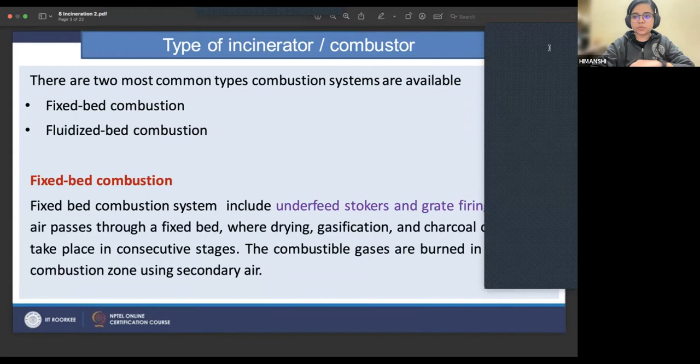Yeah, so any of you quickly, what we understood from this slide, what was the motive behind this slide? Guys, everything is written here. You can just, it's not too old, just week 2. What was it?

Without active participation, how am I going to discuss questions with you? With discussions, see, this is what happens when we are discussing things. It makes our mind more prone to understanding, and it helps us in understanding more clear, like getting more clear understanding about the concepts and the things. It's like a revision for you. So this will help you in solving your assignments as well as helping you in preparing for your final exam for the certification or the credits for whichever you guys are working. So it's okay, even if it is wrong, we can discuss, no worries.

But what do you remember from this slide, or what was the basic motive behind this slide's information? You can type in the chat box also. I don't have any problem. If you don't want to unmute and say, you can just type in the chat box. Anyone?

Okay, so can you guys at least tell me that you didn't understand whatever is on this slide, so that I can start explaining. You didn't understand what was on this slide? Okay.

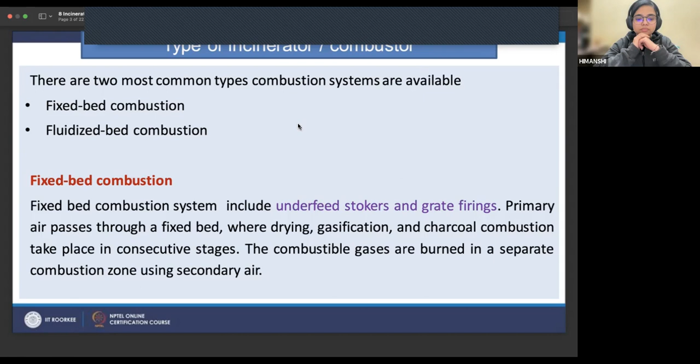Anyone of you? You can type in the chat box. You can unmute. Ma'am, can you please repeat the question? I just want to know what is fixed bed combustion. It is a type of combustion system, fixed bed combustion. What was fixed bed combustion? It's written on the slide, guys. You can read it, you can understand it, and you can make me understand.

Fixed bed combustion is basically a combustion process where the complete process is performed on a bed. Rohan, can you use a more waste to energy related term for bed? Can it be a grate? Correct? Because fixed bed is in the name itself. Bed can be anything, but in this specific case there's a long structure, a combustor, which will have a fixed bed on which your raw material or waste material will be, on which air and heat will be passed for complete combustion of the material.

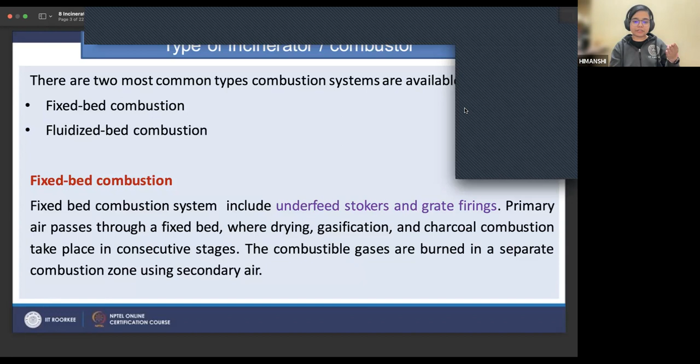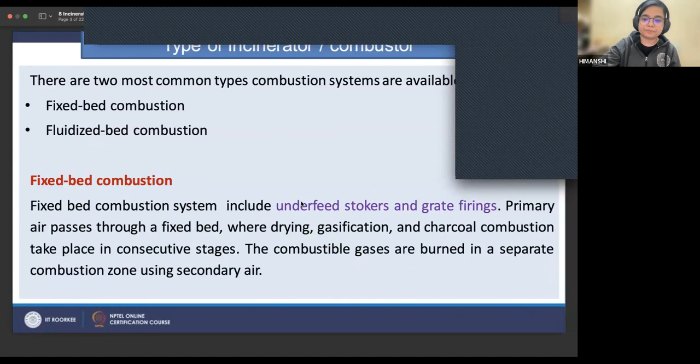Then, as you can see here in the fixed bed combustion definition, fixed bed combustion systems include underfeed stokers and grate firings. Primary air passes through a fixed bed where drying, gasification, and charcoal combustion take place in consecutive stages. The combustible gases are burned in a separate combustion zone using secondary air. Yes, a type of boiler, correct.

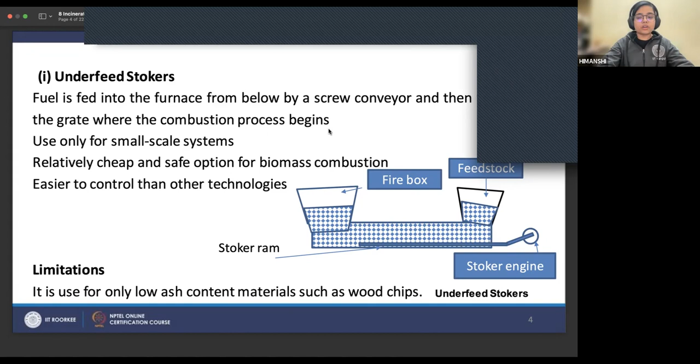So what is basically an underfeed stoker? The fuel is fed into the furnace from below by a screw conveyor. A screw conveyor is just a way of transporting stuff towards the machinery, as you must have seen in certain movies or documentaries of our industry. There is a continuous conveyor belt on which either the initial or the final products are rolling. So it is a screw type of conveyor, and they are forced into the grate where the combustion process begins. They are small scale systems and relatively cheap.

They are very easy to control. This is one of the primary types of combustors which were used. One of the problems with these older methodologies is that it can only be used for material which has low ash content. Why? Because it is fed from the bottom, right? If you have more ash content and more water content, you need to provide more air for it to be completely oxidized. Correct? So this is a kind of limitation.

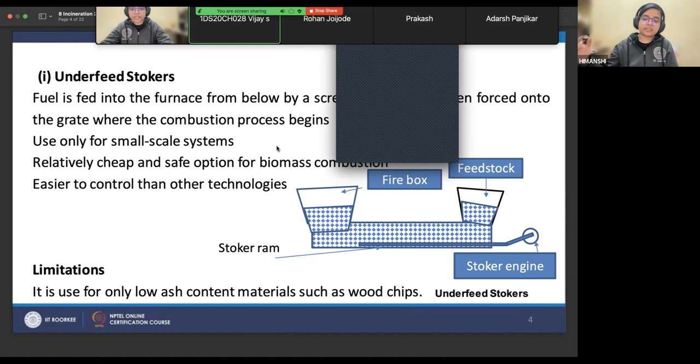Now we are moving towards processes in which the amount of energy input can be reduced, because energy comes at a cost. So we are moving towards processes in which the cost of input energy can be reduced and the quantity of output energy can be maximized. Okay. Then, as it said, the first part of the fixed bed combustor was the underfeed stoker, and the second was grate firing. So what is grate firing?

What do you remember from this lecture or this slide, what was grate firing? Any one of you? See, you guys are putting your time here, so let's utilize it to the maximum and discuss. Because these things you cannot discuss with Professor Mandal directly. He has given you the lecture. I'm here to clear your doubts. So make use of this time wisely. Correct? So any one of you who remembers what was grate firing?

Okay, none of you. So grate firing is nothing. It is basically spreading the waste material on the surface equally or homogeneously, where waste moves over grating. Grating is the bed thing which we were talking about. So air is distributed uniformly so that if you have a homogeneous

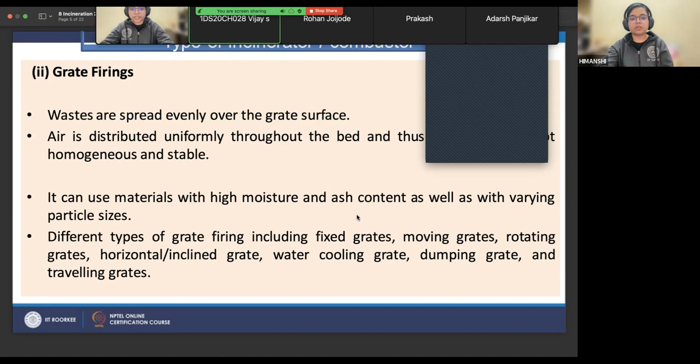Different types of grate firing include fixed grates, moving grates, rotating grates, horizontal or inclined grates, water cooling grates, dumping grates, and traveling grates. These are just some of the types of grates. You don't need to remember word to word what they are. At the end of the day, they are just a type of grate which helps the material to move from one place to another in a homogeneous manner.

So what are some of the important moving types of grate design? There are some industrial level grate designs. Each of these grates has specific roles and they are suitable for a specific type of material. So what can you tell me about the reciprocating grate? What do you remember from the lecture? What was the reciprocating grate or what does the name reciprocating mean?

Anyone of you? I know it's been a while for these lectures, but you might remember something, right? So what was it? What was the reciprocating grate? Okay, no volunteers for this question.

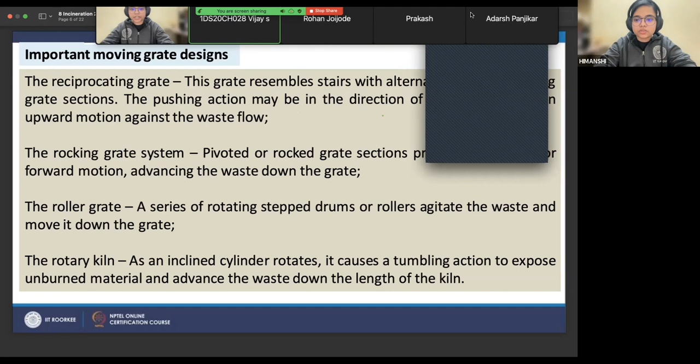So reciprocating grate is basically a type of grate that resembles the staircase. Like we have seen our stairs, right? It has gradations at a particular height. The slope will decrease or increase, declining or inclining depending upon where you are standing on the stair. So this grate resembles stairs with alternating fixed or moving grate sections.

The pushing action may be in the direction of waste flow or in an upward motion against the waste flow. This means that it is basically transporting waste material from one place to another. So if you have a stair type of something, chances are if a stair is moving like this, your waste is here and it is moving in this direction. So by this motion, what will happen?

Some of the material, based upon the density and the mass of the material, will separate. For example, if something is lighter, it will pass to this grate and again it will pass to this grate. So at the end of every stair or this process, we will be having a somewhat homogeneous mixture of the waste material.

The second is the rocking grate system. So can anyone tell me what was the rocking grate system? It is mentioned here. Can anyone just read from the slide and tell me what was the rocking grate system?

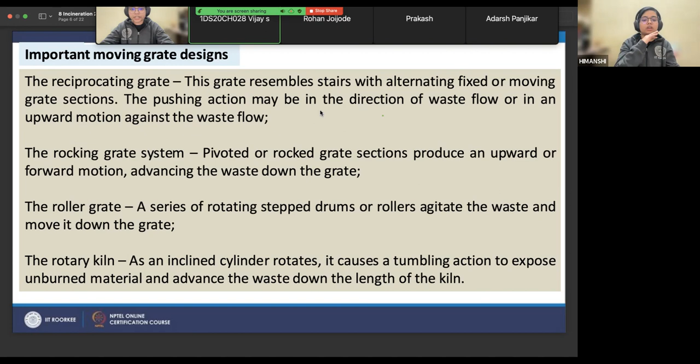The last one is the rotary kiln, which is an inclined cylinder, inclined and also rotating at the same time. It causes a tumbling action to expose unburned material and advance the waste down the length of the kiln so that overall homogeneous heating of the material can take place.

These are just the types of grates based upon the criteria which we discussed above. First one is the reversed feed grate. What was special about the reversed feed grate? Can anyone tell me what was it?

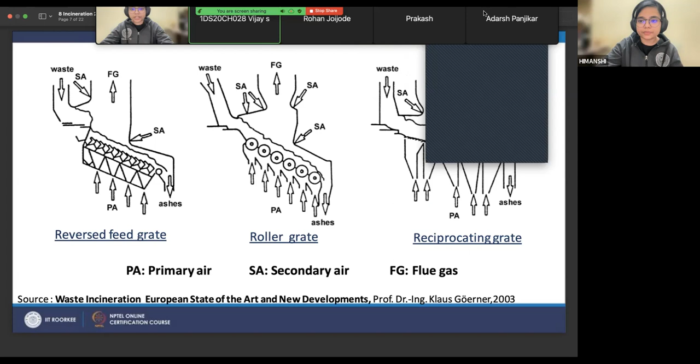Okay, you guys didn't understand much, or you guys are just not typing in the chat, because these are pretty easy things, right? These are just some theoretical things. These are not conceptual based things yet. So you just need to know, okay, these types of grates exist. These are the types of combustion. This information will help you.

For example, if you are planning to design an industry or anything on which you want to convert waste material into energy, right? So you should know what components you are supposed to use for running such a pilot plant. If you have wet type of waste material, solid waste material, municipal type of waste material, animal or agricultural type of waste material. So depending upon the type of waste material, your process will be designed. So how can you design a process if you don't know what are the operations available?

Correct? So one way of generating heat from any type of waste, here we are talking about municipal waste, biological waste, or other type of waste, one process is the thermochemical way, which we are discussing right now. In the thermochemical process, the first part is incineration or combustion process. So now we know we have a biological waste. To handle biological waste, we should go for a thermochemical process. In the thermochemical process, what are the processes available? We have incineration, we have pyrolysis, and we have combustion, right?

The last kind is the rotary kiln. What was special about the rotary kiln? If anyone can tell me, be open, you can talk. "Yeah, ma'am, the kiln is rotating, as you can see in the cement industries." Correct. Rotary kiln is mostly found in the cement industry, which is a very correct point.

And why do we need rotation for this giant tube? Inclination, I can understand that it will reduce the input energy in pumping things. But why do we need rotation or a tumbling effect for this? Because if you're turning a giant tube, you are providing it energy via a motor, and the motor is run by electricity, and electricity is costly. So why do we need tumbling action? "To ensure all feed is burnt."

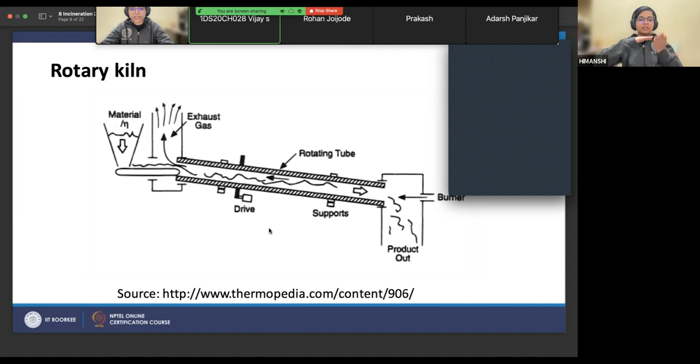Good. Because if you keep it stationary and your heat source or your air source is here, chances are whatever is in direct contact with the surface will get burned easily, or will get all the energy. And whatever is above this direct layer won't get that much energy. So if you're rotating it, the things which are not getting proper energy will come to the bottom, take the energy, and again go to the top. So it will provide us proper mixing as well as heating. Correct?

So that's basically how things are burning on grates. So what was the motive behind this slide? As we discussed right now with tumbling, there's very basic physics involved, related to parallel flow, counter flow, center flow, direction of flow. What do you mean by direction of flow? Direction of flow of what? "PA and flue gas." It is not about the flue gas, it is about the waste material. The flow is with respect to the primary air circulation and the feeder or the waste material you are providing.

If you are providing waste material at this end and your air also at this end, they both are moving in the same direction, which means they are in parallel motion. Second, if you are feeding your waste like this but providing your air like this, they both are counter flow processes. Last but not the least is center flow: you provide your waste material here and your air flow directly in the middle, where there's a region where air and waste material get mixed. This is called center flow.

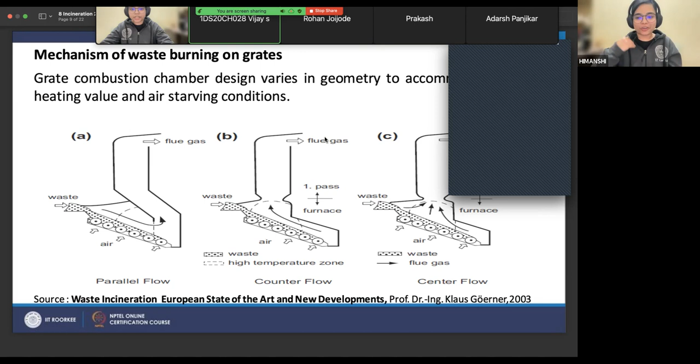Correct? Am I making sense to you guys? Yes, no, okay. Anything in the chat? I'm asking in between so that I know you guys are able to hear me and I'm not talking to myself. Good, great.

If you have low calorific value biological waste or solid waste or MSW, right? We can go with parallel flow. If you have high calorific value material with you, you can go for the counter flow methodology. If you don't know what kind of material you have, but still you want to get at least the average of both worlds, the high calorific value one and the low calorific value one, you can go with the center flow.

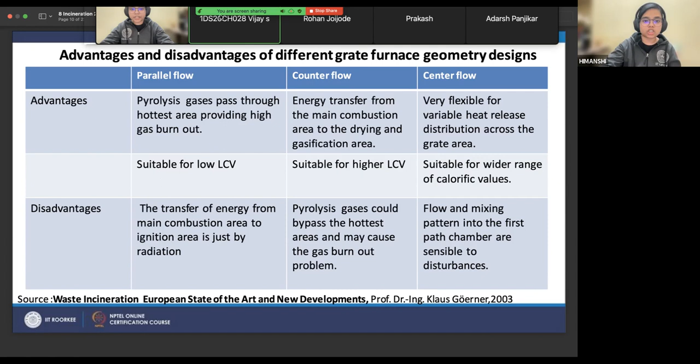Ma'am, it's a heat transfer mechanism by electromagnetic waves, ma'am. By electromagnetic waves. Okay. Other one is convection and conduction. Okay. Conduction, convection, and radiation are the three processes to transfer the heat. Can you distinguish between conduction and convection? As someone has already told me about radiation, can anyone of you tell me about conduction? Go ahead. Hello. Ma'am, yes, conduction generally in metals, ma'am. Convection in gas and fluids.

Okay, but these are the modes of heat transfer, right? They are not types of heat transfer based upon where they happen. So what you are telling me is that in gases convection happens, in solids conduction happens. There is a basic underlying principle for conduction, convection, and radiation. On what basis are these three things classified? I'll give you a hint. It depends on the medium they require, whether the medium is in direct contact or not. Correct, Rohan, you are right. It depends on the medium of heat transfer.

So if electrons are vibrating at a higher rate and they are moving from one place to another, the electron itself or the atom itself is moving from one place to another place. This is the source of heat. This is the farthest terminal. If I'm providing heat from this direction, the molecules here are heated, and the molecules are directly going from this end to this end. What will this mode of heat transfer be called? The molecules are moving themselves. Will it be conduction or convection or radiation? Convection, ma'am. It's convection, correct.

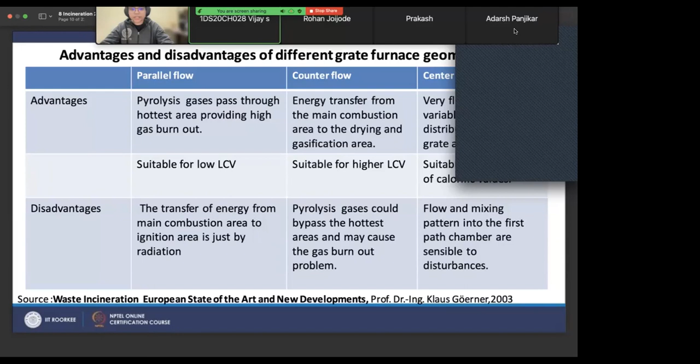Any guesses? Not complete heat transfer. No, Rohan, I don't think this is the right answer. Anyone else? Radiation becomes ineffective with length, ma'am. Yes, in a way, you are correct. So what happens is, to get the same amount of heat transfer, compared to conduction and convection, radiation is the slowest one. So if you're providing 10 kilojoules of energy to heat something, and conduction is taking X minutes, convection is taking Y minutes, radiation will definitely take more than X and Y.

So to get the same amount of energy transfer, if the mode of transfer is radiation, we need to provide more energy for a longer duration. You get my point? That is why it is a disadvantage. If we have a conduction or convection process, we provide heat, and in a few minutes the energy is dissipated equally throughout the system. But if the mode of heat transfer is radiation, we need to provide energy, energy, energy, and only then will it be distributed in the system to give us a similar output as conduction and convection.

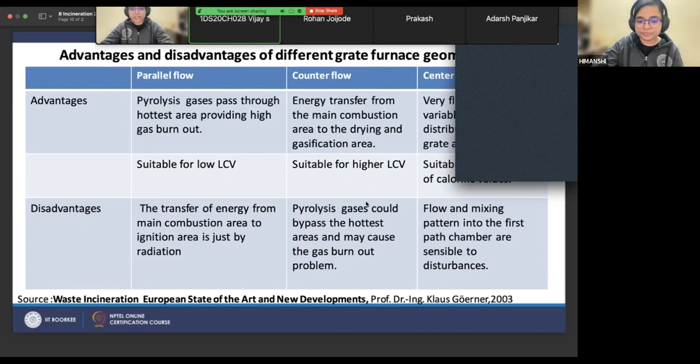So what was the crux of this slide? As we said, there are two types of incinerators or combustors. First was fixed bed, which had two things. What were those two things? The grate and the feeder, correct? The other one is fluidized bed combustor or combustion process. So what is fluidized bed combustion?

Any one of you? As the name suggests, it's fluidized bed and not fixed bed. It is not a test for you guys. No one is marking you or judging you. You can say whatever you want with respect to the discussion we are having here. No need to worry if it is wrong or right.

Heat transfer is through medium. Rohan, can you elaborate it a bit more? Whether you are answering me for the previous questions or this current fluidized bed combustion? And if it is for fluidized bed combustion, what do you mean by heat transfer is through medium?

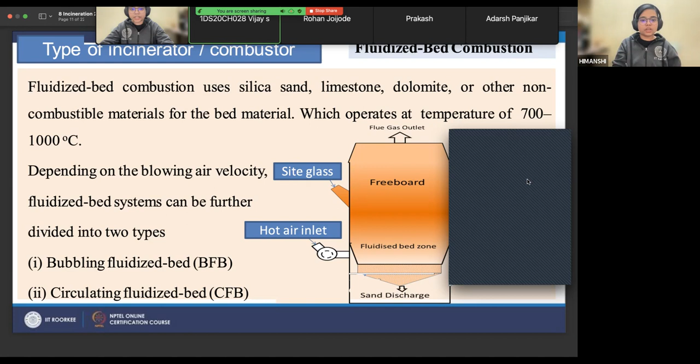So what will be the problems when particles are suspended in the air? You are breathing them in, right? Even your own respiratory system won't be able to filter them out because the particle size is too small. So what will happen? They will get accumulated in your lungs. I hope that you guys know the structure of lungs.

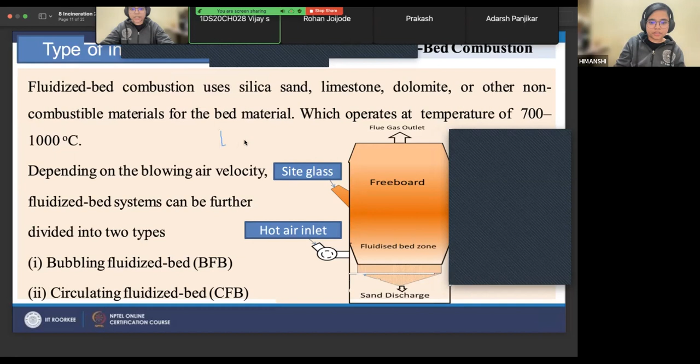And if not, for example, suppose this is your body, this is a lung - each lung has very small vacuoles in them. Vacuoles are nothing but the smallest section of your lungs. So if some smaller particles are coming in, what will happen with time? They will get accumulated in your vacuoles, or alveoli, we call them. So this will lead to decreased respiratory ability, which means with time, you guys won't be able to breathe properly. So these are very small particles.

So if you are at such an industry, an interface where you need to handle and take care of particles or material which is of very fine quality, you cannot directly burn them. Because if you're directly burning them on a fixed bed incinerator, what will happen? They will quickly evaporate and convert into SOx and NOx. I hope by now you guys know what SOx and NOx are. Which is again not a good thing.

So we can use fluidized bed combustors in processes in which the particles are so fine that if you provide some amount of airflow, they will just float in the air. But if they are floating in the air, we cannot directly provide them heat. So one way of providing heat is to put a material which can carry the heat, and with the help of collision, what will happen? The basic thing is silica or sand - if you have seen some deserts, you know that sand absorbs heat very quickly as well as it releases heat very quickly.

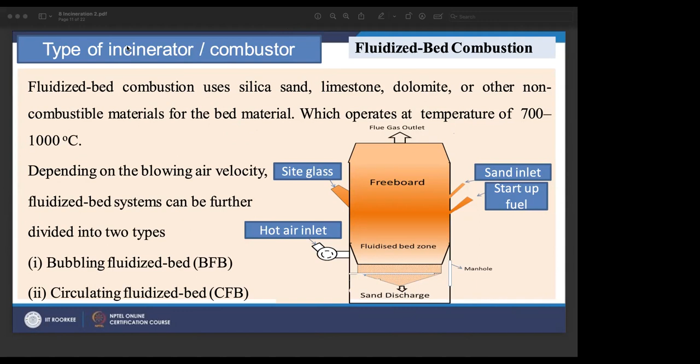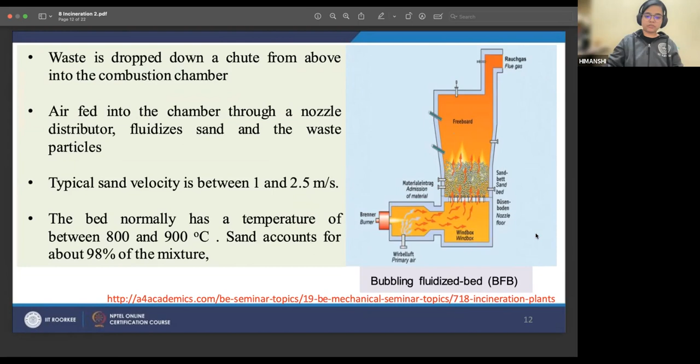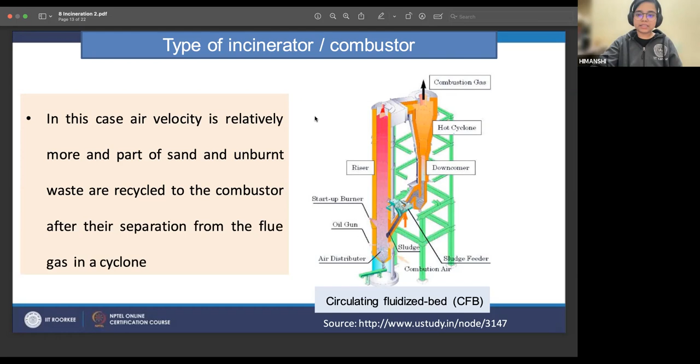So it generally operates at a temperature of 700 to 1000 degrees Celsius. Depending upon the air velocity, fluidized bed systems can further be divided into two types: bubbling fluidized bed and circulating fluidized bed. Again, you don't need to go into the deep, you just need to know the principle and what options are available. This is basically a type of fluidized bed in which a bubbling effect is observed during combustion. The next one is the circulating fluidized bed. You don't need to worry about the terminologies in the figure, just know what a fluidized bed is and its advantages and disadvantages over fixed bed combustors.

So talking about advantages and disadvantages: first, it is suitable for high moisture fuel or low grade fuel. The typical operating temperatures are lower than the fixed bed system. Why are we saying the operating temperatures are lower than fixed bed systems? Any logical reason why fluidized bed requires less temperature than fixed bed combustors?

See, we remember, right? In fixed bed, the heat is directly transferred to the waste material. In fluidized bed, the heat is transferred to the carrier - the sand, silica, or limestone. So we don't know whether the waste material is homogenized or not. It is to some extent, but not necessarily 100% homogenized. So to get the same effect in fixed bed, we need to provide more energy. But in fluidized bed, since the sand is there, we know what amount of heat is required for the sand to get activated and combust the waste material. That is why the operating temperature in fluidized bed is comparatively lower than fixed bed systems.

Third point is higher combustion efficiency, obviously. And the last one is more suitable for large scale operations. And here they are saying large scale operations because, as I told you, you need to work at the interface of environment as well as industry.

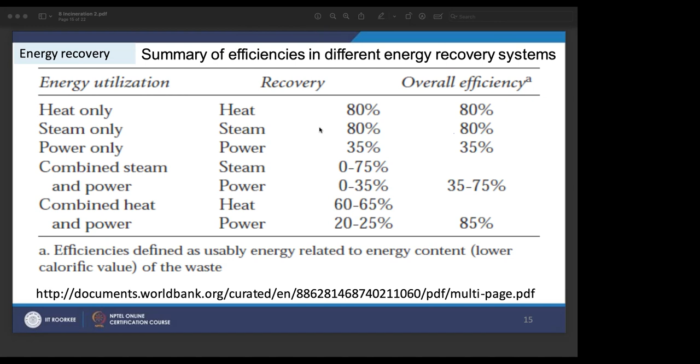Yes ma'am. The next one is obviously combination of steam power and heat and power. This is just for your overall information. The last one is environmental aspects of combustion and incineration. We have already discussed some of this, because the end product of combustion will be the oxides of the material, some of the compounds which are formed during the process which are not inherently present in the material, some of the gases which will be formed due to the combustion process, and the removal of the material, right?

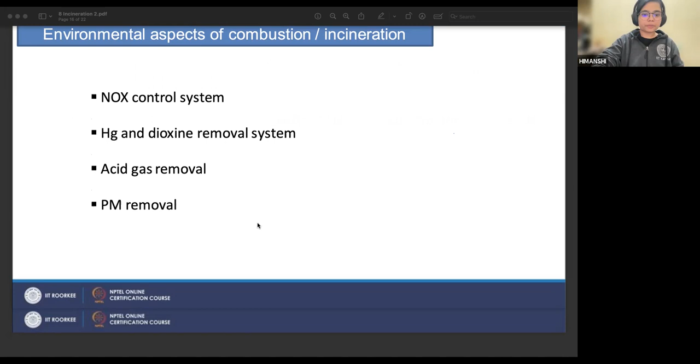So we are not going to... okay, this was slagging. Okay, what was slagging? If you guys remember.

What was it? See, if you are even at your home, for example, if you are cooking something, let's take cooking on a stove. So if you are providing heat, the utensils nowadays are made with technology so they don't burn easily. But if you're providing heat continuously, chances are the bottom of your vessel will be burnt, right? And it is very hard to remove that burnt part if you're not immediately soaking them or providing a very harsh detergent or soap. Chances are you need to put more energy into cleaning them.

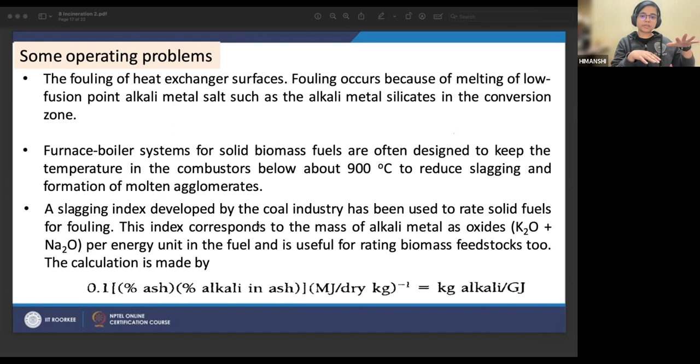So similar things will happen at a bigger scale also. If you have a boiler or a combustion chamber, you're providing energy to it, and there's material there. So if you're providing a high amount of energy or heat or air, what will happen? Due to temperature, things will get accumulated on the surface. Specifically, if it is a fixed bed type of combustor, things will get accumulated on the surface. And if things are getting accumulated here, it will indirectly hinder the heat flow. You get my point? Wait, let me explain it in a better way.

So this is your bed, this is your flow of air. If I have fouling already from the previous cycle, and I haven't cleaned my combustor well, and this is a fixed type of combustor, chances are things might be charred here, they will be accumulated here. So for the next cycle, when I'm providing the same amount of energy, my waste material will be here. Now my heat has to travel the fixed bed distance as well as the distance of the material which is accumulated here, so this amount of energy might not be reaching the waste material itself.

In a way, we have decreased the efficiency of our system, because earlier we were providing 2 units of energy and we were able to combust the material, since the energy only needed to cross this fixed bed barrier. Now, as the fouling or slagging occurs, the energy provided has to travel a distance of the fixed bed as well as the slag distance or whatever is accumulated there. So the same amount of energy won't work in this case. That is why slagging is a problem. I hope I made myself clear. Yes, no.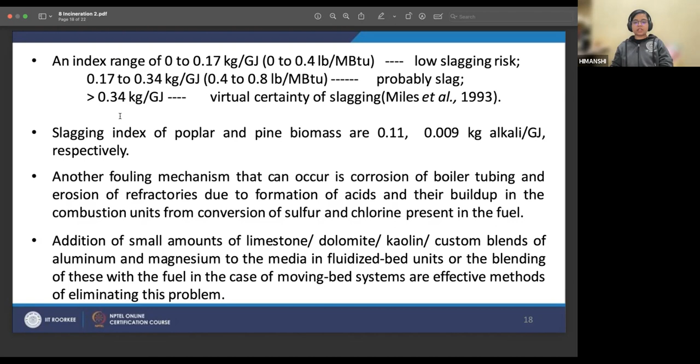This is just the index which is provided for slagging. So if your index is less than 0.17, things are not gonna slag. If the index is between 0.17 to 0.34, things are probably gonna slag. And if it is more than 0.34, it will definitely slag, and you need to take care of this slag, right?

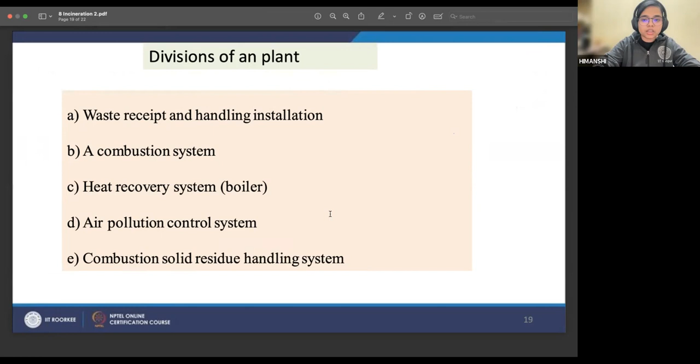Can we go to the next lecture? We will take very less time in discussing that. We can discuss gasification. Because incineration, most of the points I have covered, we don't need to go back for the first incineration part. There is something wrong with sharing. Wait. And then we'll quickly move to some of the basic previous year assignment questions, which will help you guys in understanding and solving current year assignments.

What are your deadlines for the second week assignment? Can anyone tell me?

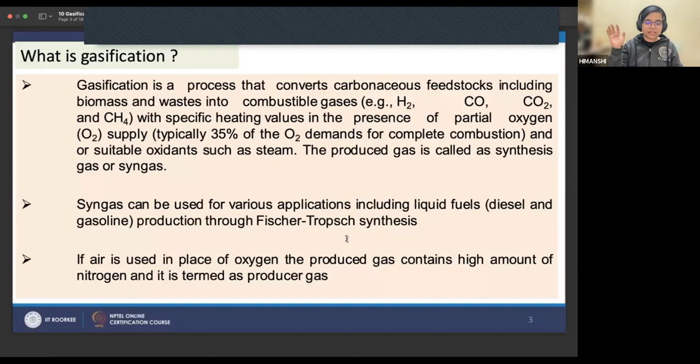And for producer gas, air will be provided, and air has a component of nitrogen in itself. Hence, the product will also contain a nitrogenous output, and that gas will be called producer gas. So here is the overall oxygen requirement for different processes. The ratio of oxygen to coal; here coal you can directly consider as carbon weight or carbon percent. How can you take the carbon quantity from a waste material?

There is some analysis. Okay, I'll give you an MCQ. Is it proximate analysis or ultimate analysis, from where you can get the fixed carbon quantity? We have studied this in the first week. Good. It's proximate analysis. So we can get the carbon quantity from there.

So if the ratio of O2 to carbon is greater than 2.5, the products will mostly contain oxygen, water, and CO2. If the R value is within 0.68 to 2.5, it will now contain some amount of H2 and CO. If the ratio is less than 0.68, it will mostly have char, CO, and H2, and the process will be called pyrolysis. You don't need to worry about the remarks; it is just for information.

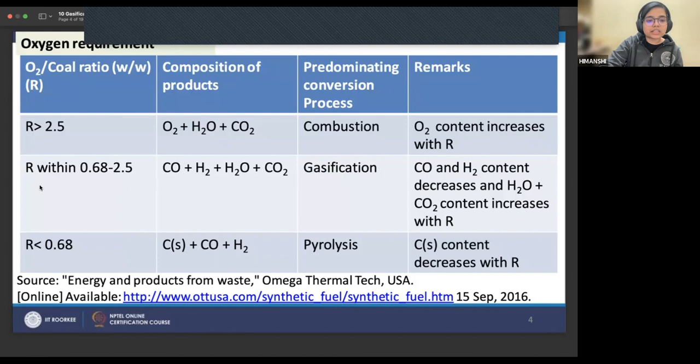R value is the O2 to coal ratio. If we have more R, complete combustion is there. If R is in between, we have gasification. And if R is less than 0.68, the denominator is more, meaning coal percentage is high; with limited oxygen it won't be completely combusted into CO2 or H2O. So char and CO, a partial oxidation product, will be there, and the process will be pyrolysis.

So some basic chemistry involved in the gasification process, with respect to energy. I guess most of you are from a chemical engineering background. Can you tell me what delta H is, and whether minus 110.5 is good, or minus 393 is good, or plus 172 is good?

Can I get some answers? Heat required. Delta H is heat required. Okay, minus H, minus heat required. What do you mean, Rohan? Can you write a bit elaborately? Delta H, enthalpy change. Okay. So minus value is good or plus value is good? Means endothermic. Negative means endothermic. Okay. Plus. Negative means exothermic, ma'am.

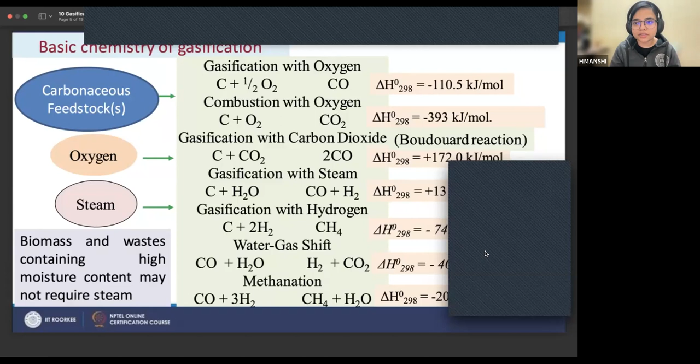Can you repeat, Vijay? What are you saying? Ma'am, negative means exothermic or endothermic? It's exothermic. Negative means exothermic. Yeah, I was gonna correct. That is why I asked him about plus. I'm reading from the chat. Ma'am, negative means heat is generating. So negative is exothermic, positive is endothermic. So minus is good or plus is good? Minus is good, ma'am, obviously.

Minus is good. Correct. So Rohan, can you just check once that you are saying it's endothermic? Just cross check whether Vijay is correct or you are correct. According to me, minus means exothermic, which means the heat is releasing, and plus means heat is provided to the system. Hence, we are giving more energy in comparison to what we are getting. Correct?

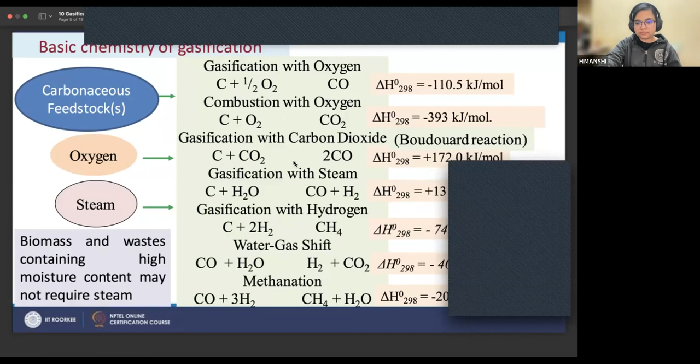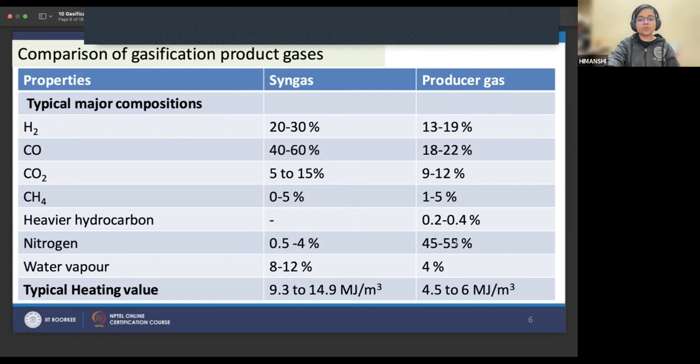Then, as I said, this is the major difference between syngas and producer gas. For syngas, oxygen is provided. For producer gas, air is provided. And we can see the huge difference in the nitrogen content between syngas and producer gas. These are some basic reaction schemes which you can go back to in the lecture; there is nothing much to explain. Professor Mandal has explained them in quite a good manner.

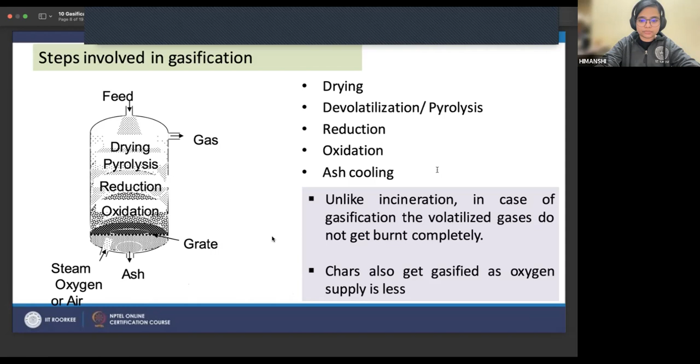Then these are the basic steps involved in the gasification process. The first one is drying, then pyrolysis, reduction, oxidation, and then ash cooling. Correct? These are some of the equations which, you don't need to know much about them. You just need to know the basic principle of gasification. These equations are here to help you in balancing the output of a gasification product, because if air is there, air has nitrogen, has sulfur, which means the end product will have nitrogen and sulfur also.

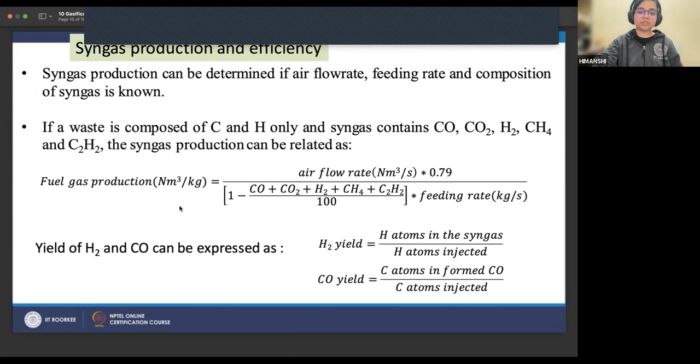This is the important gas phase reaction when you have a sulfur compound and CO2 all together in presence of heat. Then these are some of the formulas. You need to remember them. As far as I know, you need to remember them. There is no shortcut way of surpassing them. So again, it is for syngas efficiency.

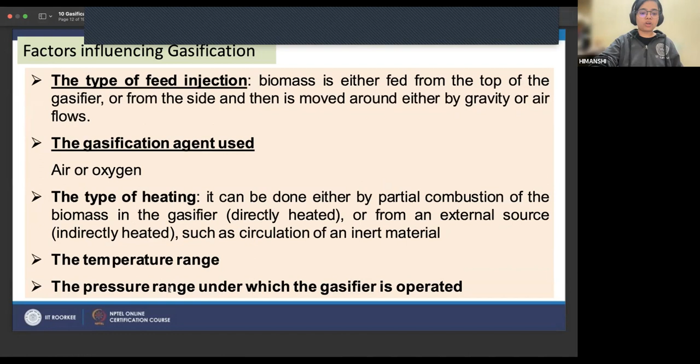Then what are the factors influencing gasification? The first one is the feed injection, the gasification agent itself, the type of heating, the temperature range at which it is operating, and the pressure under which it is operating. Because all these things at the end will ensure whether complete heat transfer is there or not.

Correct? So why do we go for gasification and not pyrolysis or combustion? Because there is less CO2 emission. And why are we looking for less CO2 emission? Because CO2 is a greenhouse gas. That is why we are moving toward this gasification process. The other is compact equipment requirement with a relatively small footprint, which means the energy required to run a gasification plant is less in comparison to that required to run an incineration plant. Accurate combustion control and high thermal efficiency.

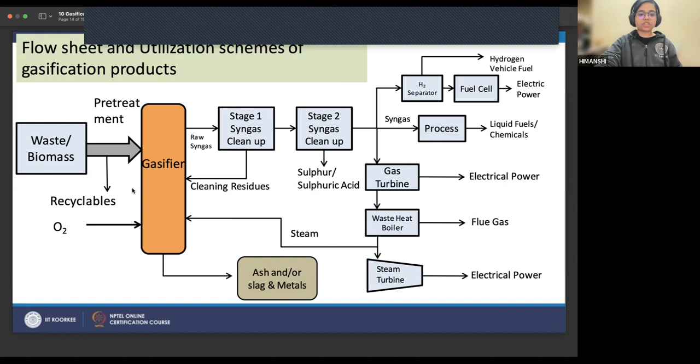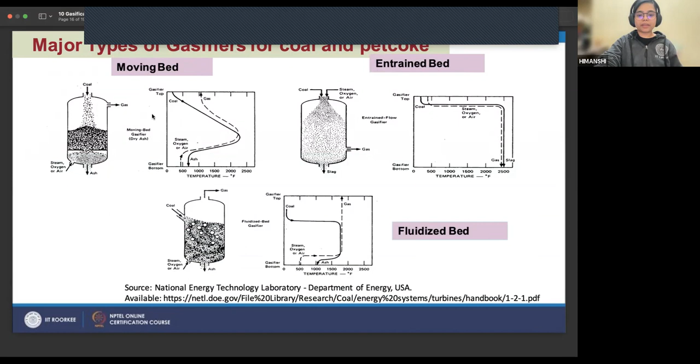Again, this is the basic flow diagram of how a gasification plant or process flow looks. These are just some of the conditions which were mentioned. Then here are the types of gasifiers. You don't need to worry much about the graph. You just need to know what types are present. As we know, moving bed, fluidized bed is similar, the principle will be the same, and entrained bed. These are some of the conditions for gasifiers. Again, same thing. And now I guess we can quickly move to our questions, which you guys are waiting for.

And here it is. Can you guys see my screen? Yes, ma'am. Okay. So you guys need to solve now. All of you have to send me the answer in the chat box. If I have 50% of the population in the chat, then only I'm going to tell you the answer. Done? The questions are pretty easy and you guys are very smart. I know this. So let's go ahead. Okay. So what is this figure?

Is it a rotary kiln? Is it a ball mill? Is it a dryer, or none of these? Rotary kiln, ma'am. Okay, one answer. And I got a second. Okay, I got the answer. It's good. It's a rotary kiln, and I don't think I need to explain much about it.

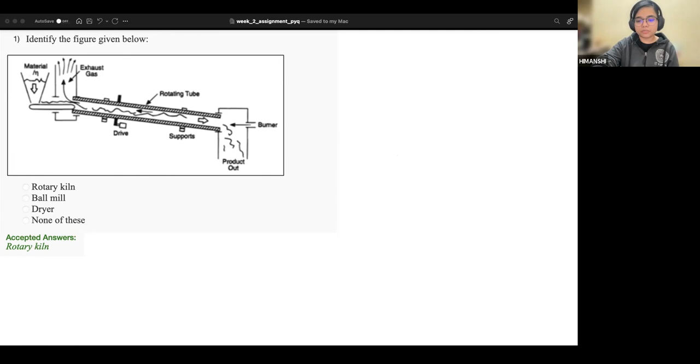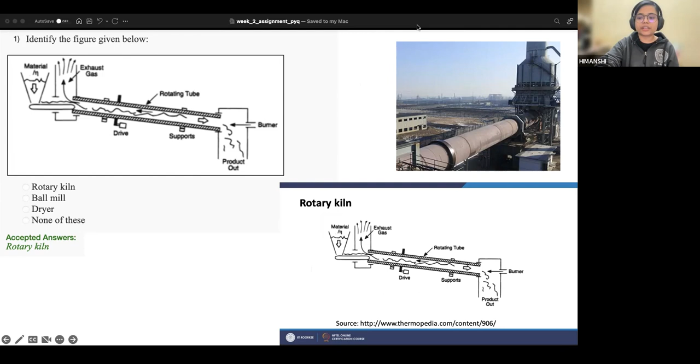This is from the slide, we can clearly see, and this is live, like from a plant I was telling you about. You can see the scale of this kiln, right? And it is from a cement industry, as someone has mentioned correctly. Now,

Second question: the correct sequence of the biomass-based gasification process. Is it drying, then pyrolysis, then reduction, then combustion of volatiles and char? Or is it drying, reduction, pyrolysis, combustion of volatiles and char? Third, pyrolysis, drying, reduction, combustion of volatiles and char. And last, drying, pyrolysis, combustion of volatiles and char, and reduction. Answers in the chat box, please.

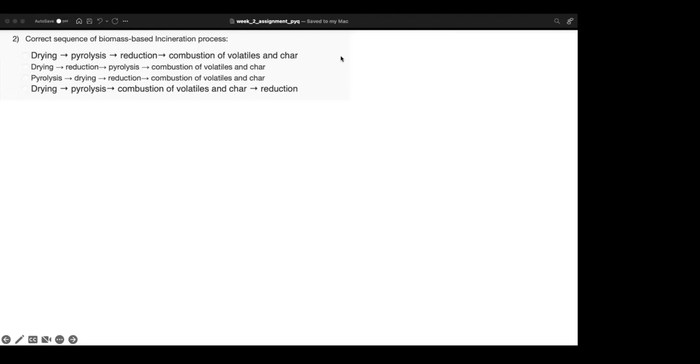Okay, I got one answer. You can just tell me the option number. Option A. Okay, so I have mixed answers now. One person is saying second, another person is saying one. More answers. Either you can unmute or you can type in the chat box. Two. Okay, one more answer and then I'll tell you which is correct. Is it one or two? Okay, we still have time, but let's see what the correct answer is.

The correct answer is first. Need not worry if you were wrong. It is directly mentioned in the lecture. First, it will take the drying phase, then the pyrolysis and reduction phase, and last but not the least, the volatile gases and the char combustion phase. Is it fine?

Those who were saying second, the thing is you cannot reduce the material in the starting phase. You need partially combusted material for the reduction. If you are reducing early, the pyrolysis will be the complete combustion process then. You got my point? You need to first pyrolyze, which means reduce the material to a somewhat elemental state, and then reduce it for the complete combustion of the product.

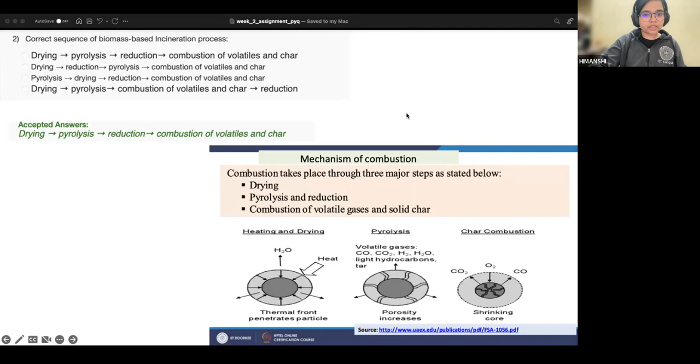Then, what is the range of excess air requirement for effective combustion of waste and biomass? Is it 70 to 90, 5 to 50, 0 to 5, or 90 to 100? Answers in the chat box, please. Even if you don't know the exact percentage, just use some logic: we are talking about excess air. Can excess air be 70 to 90% of the air provided for the combustion?

Few more answers, please. See, again, if you don't remember the exact number, just use some logic: if you're providing 100 units of air, will the excess air be 100 units again? It will be a waste, right? You'd be providing double the amount required. So what will be the excess required? One more answer and then we'll discuss the question.

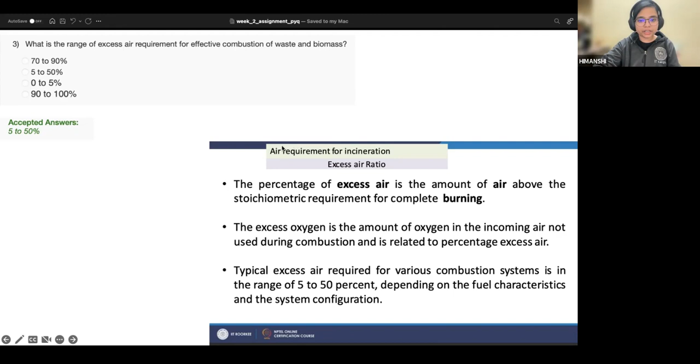Are you guys able to follow me? Like, was it okay? Because it's okay if you don't remember the exact percentage. This is the way how you can tackle some of the questions even in your current assignment or in your future examination, that if you don't remember exactly, you can just take the question and think it in a logical way. Correct? Now we'll go to the next question.

So, gasification of the biomass and waste converts its organic part into combustible by interaction with oxygen and steam so as to obtain a secondary gaseous fuel of high calorific value, having no ash. Gasification reactions in fluidized bed gasifiers are normally carried out at about what degree Celsius? Like, what is the range? First, 400 to 500, 900 to 1200, 1400 to 1500, or 1700 to 1800.

Okay, I have some answers. I need more answers. I'll give you guys 2 minutes. And I know it's a theoretical question, but just again, if you want to input some logic, you can. But I think it's a memory based question unless you are in the gasification plant. So don't worry if you don't remember it. You can always go back to the lecture and revisit those things. Okay, I have few answers.

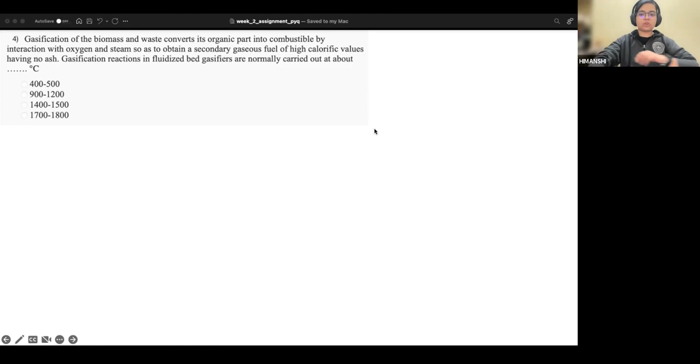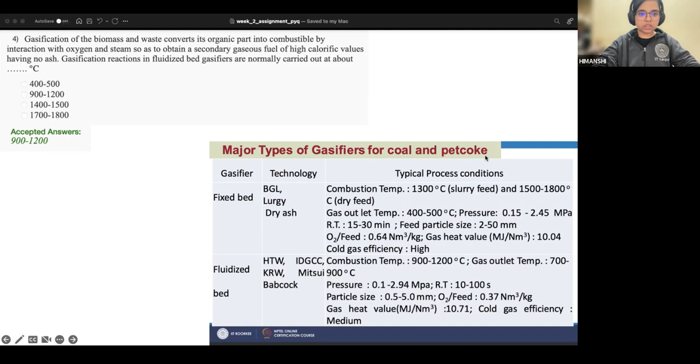Again, this one. Okay, which grate resembles stairs with alternating fixed or moving grate sections? We have discussed quite a bit on this today. First, the roller grate. Second, the rotary kiln. Third, the reciprocating grate. And last, none of the above. Again, go to the words, what they are saying, and go to the question, what is the motion associated with the question? Then you can easily tell me the answer.

Okay, I have some answers. I need more answers. It is a very easy question we have discussed today, and I have told you guys also that if you don't remember the exact meaning, you can always associate the motion which the grate is doing with the name of the grate. One more answer.

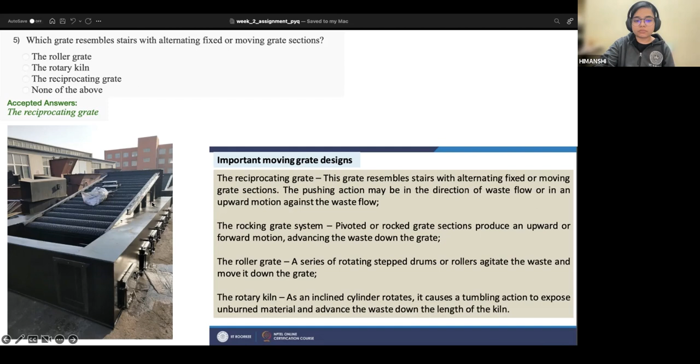Then what is the R value or the ratio of O2 upon coal ratio weight by weight for gasification processes? First, is R between 0.68 to 0.25? Second is less than 0.1. Third is less than 0.68. And fourth is greater than 3.5. I'll give you 1 minute for this question.

First, remember what R value is and what it signifies basically. And we are talking about gasification processes, not combustion, neither pyrolysis. So what we know about gasification, is it a complete combustion or a partial combustion? And then we can easily know about the R value.

Okay, first, 0.62. Okay, okay, I get it, the first option. Can I get more answers? I guess one more answer. Most of you have answered me, and whoever is not answering me, you can always just unmute and ask me if you have any query.

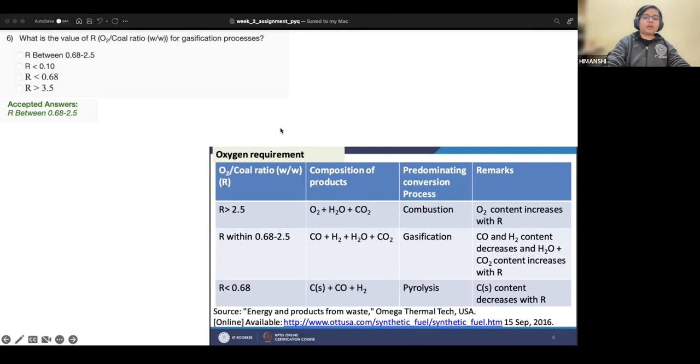Then again, I think it's a direct question. So if air is used in place of oxygen in gasification process, the produced gas is known as syngas, coke oven gas, producer gas, or gobar gas. I'll give you 1 minute for this question.

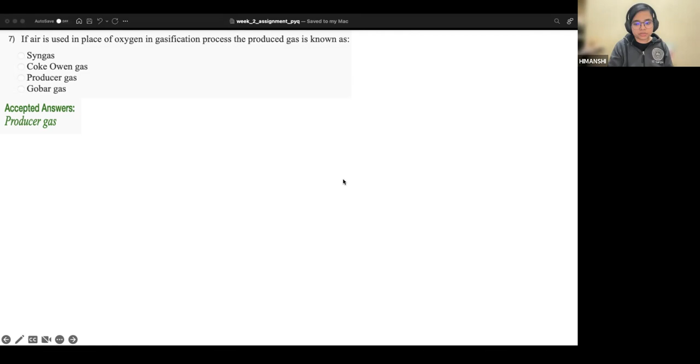Okay, I have one answer with me. A. Okay, someone is saying A. I have 3. Okay, I guess majority of you have told me the thing, but the answer is producer gas. Those who were saying syngas, remember, huh?

Ma'am, in air we are having 78% nitrogen and most of the elements present inside it. So in that gasification process, if we are replacing oxygen with air, and air contains lots of elements like 78% nitrogen and carbon dioxide and oxygen, then the gas won't be like producer gas, because syngas is basically CO plus H2, right? So it should be, I think, syngas. No, this is, I believe,

the definition which you are saying is correct. Air contains nitrogen content, it contains sulfur content and other trace elements also, right? So if we are providing air into the combustion process, obviously these elements will also go for oxidation. While if we are giving only oxygen, oxygen doesn't have other elements in them, which means the end product will be CO, H2, and CH4.

But if we have air which has nitrogen content, that nitrogen content will also be combusted or oxidized to produce NOx. NOx means nitrogen oxide, correct? So the syngas containing nitrogen is called producer gas. Whatever you are saying is correct, it is just that you have labeled the things wrongly.

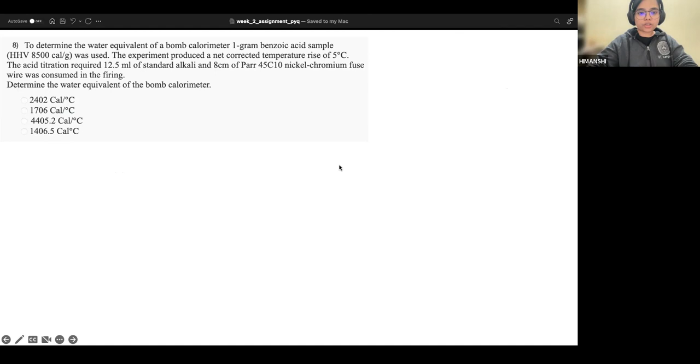So now we have, I guess, three numericals lined up for you guys. So for each numerical, I will give you around 5 minutes. So your 5 minutes for this numerical starts now. And I think you guys might not remember the formula, so for your help and guidance, I'm providing you the formula also. So just try to solve it and your 5 minutes starts now.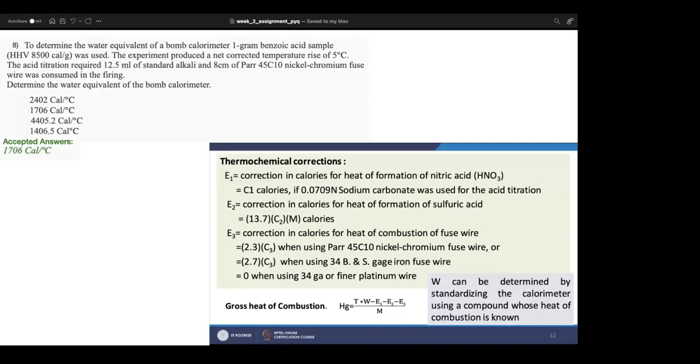Then this is the formula. In the earlier formula, this formula is for heating value calculation, but in the question it is asking for the water equivalent. So water equivalent is W. We just need to rearrange the same equation.

If you rearrange it, the equation will become H into M plus E1, E2, E3 divided by temperature change. Then E1, E2, E3, as we already have C1, C2, C3, we can easily calculate based upon this formula again, and we can just put these values and we'll get to the answer. It's not that difficult, you just needed to manipulate this equation a bit, and everything else was given.

Correct? I don't think you guys have some issue with this. Again, same thing I will repeat: if you have some issue, we have a discussion class tomorrow also. Please do join and try to take maximum out of these discussion hours.

Here we have one more numerical. Please.

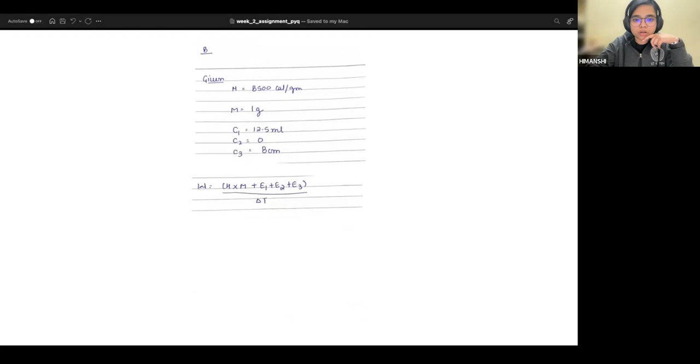Ma'am, I wanted to ask that in the last class session, we were not able to get the PPT that you had. Okay, those PPTs are not circulated to you or what? Ma'am, actually I wanted to get those PPTs. Get the PPT which you were discussing? Yes ma'am, this one, now.

I think these will be provided to you at the end of the course or something like that. But if you want this discussion, these discussions are on YouTube also. I will upload these lectures on YouTube. The previous lecture is already uploaded.

What is the name of the YouTube channel? I'll quickly share my screen after discussing all these questions, and I'll copy paste in the chat box the link of that video also. Is it fine? Okay, yes ma'am, these things are already published on YouTube. You guys can access it. Okay.

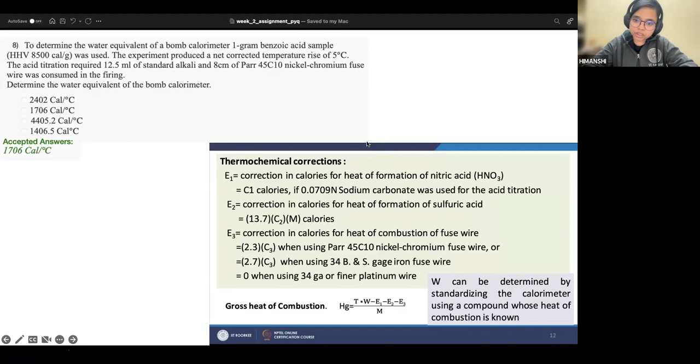Okay ma'am, and I guess the links and these PPTs I have uploaded on the cloud, but I guess the NPTEL team has not yet circulated it to you guys. There might be some reason, but it's already on the cloud. No worries, you will get the slides. So I don't think so.

Do any of you have any question regarding this problem statement? Well, it is pretty simple and straightforward. Should I move to the next question? Yes ma'am.

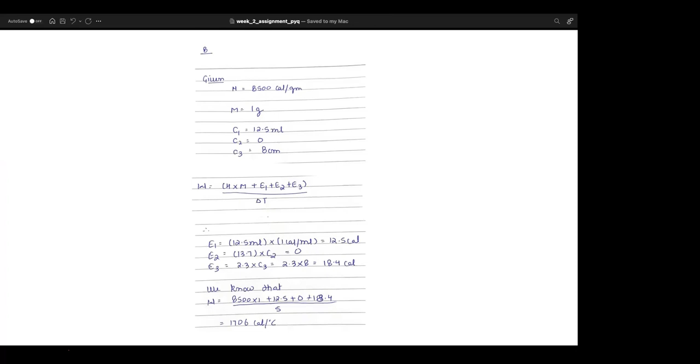So we have another problem statement here. I will give you 5 minutes. Your 5 minutes start now. So the question is:

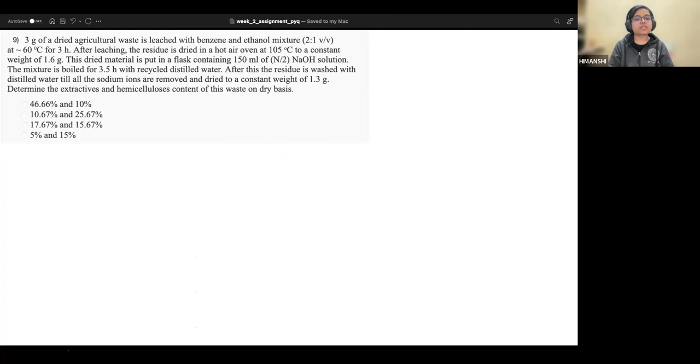3 grams of our dried agriculture waste is leached with benzene and ethanol at around approx 60 degrees Celsius. After leaching, the residue is dried in a hot air oven at a constant weight of 1.6 grams. This dried material is put in a flask containing 150 ml of NaOH solution. The mixture is...

Please mute yourself, there's a bit of disturbance. Kindly check your mic. Yeah.

The mixture is boiled for 3.5 hours with recycled distilled water. After this, the residue is washed with distilled water till all the sodium ions are removed and dried. Determine the extractives and hemicellulose. I hope most of you are able to solve this question because a similar kind of question has been solved in the tutorial section, so I hope all of you can answer it. And your 5 minutes are starting now.

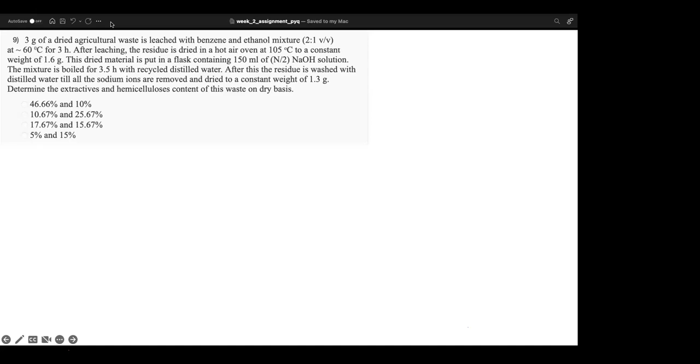One more answer, one more attempt. Again, a similar type of question has been discussed by Professor Mondal, so I hope it's not a difficult question. I don't think it's a difficult question. You guys just need to put your logic, that's it, nothing much. You don't even need to remember a particular formula. It is just a game of mass balance.

So just one more answer and then we'll discuss the solution. Or say one more minute, I guess we should not spend more time. Okay, is anyone of you about to send me an answer? If yes, I'll wait one more minute, and if no, I'll discuss the solution.

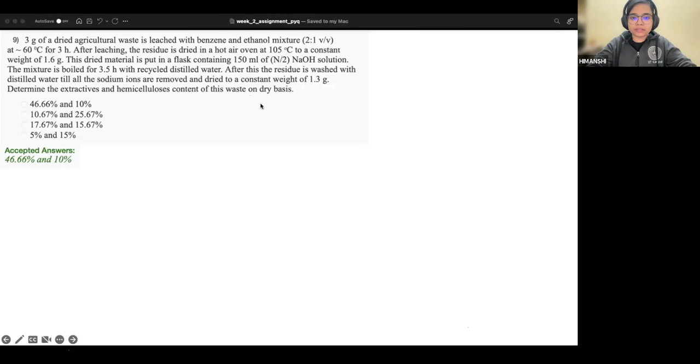Well done. I hope you have done it with the methodology I'm sharing with you guys. So, the initial weight or the M naught weight is given, which is 3 grams of the waste material.

After extractives, the weight is 1.6 grams. After hemicellulose, the mass is 1.3 grams. Now we have masses after every step, after extractives and after hemicellulose.

Now we just need to know the content of extractives and hemicellulose. How we can take the content of a thing: it is basically the difference of the thing to the initial of that thing, can be amount or quantity, multiplied by 100. It will give us the percentage, right?

It's some basic math. So the weight of extractives will be M naught minus M1, which will come to 1.4 grams. The weight of hemicellulose now will become, because the initial weight will now be after the extractives, M1 minus M2.

The difference is 0.3. Now for extractives percentage, the difference upon the initial multiplied by 100 for the percentage, it will be 1.4 upon 3 into 100, which will give you 46%.

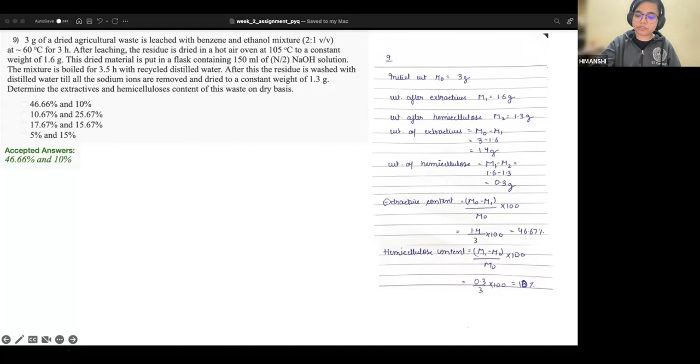Similarly, for the hemicellulose, it will be the difference upon the initial into 100, and it will give you 10%. Correct? So there was not even a direct formula in this, it was directly a question about mass balance. Now we'll go to the last question for today.

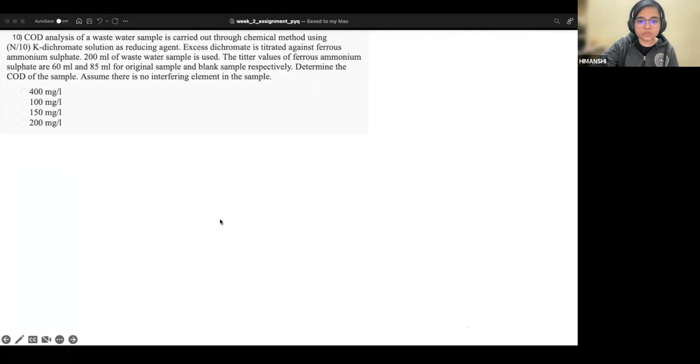It's a direct question, it is a formula based question. So if you remember the formula, well and good, and if you don't, I'm giving you the formula here. Try to understand the question, put the formula and give me the answer. It's a small question, so I'll give you 3 minutes for this. Is that fine? At least try and then let me know the answer in the chat box.

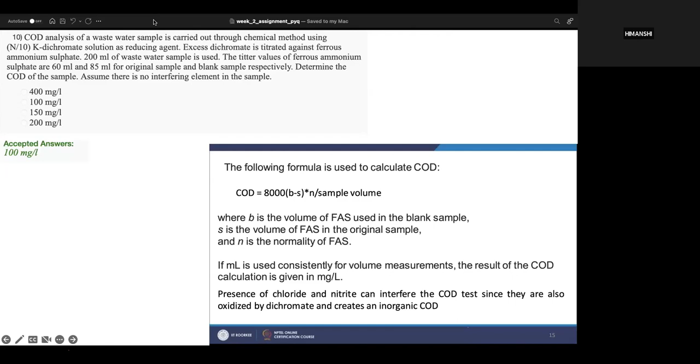Congrats for that. And for those who were not able to get the right answer, but were still able to attempt it, kudos to you too. So we'll see the solution to this. As you can see from the equation itself, it's a direct formula.

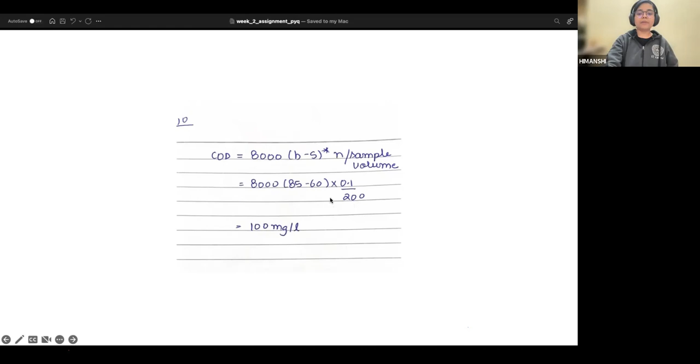So the solution is pretty straightforward. You just have to put the given items into the formula itself, and it will give you the answer. So here B is 85, which is for blank, and S is your sample, 60. Your N is 0.1 here, and your sample volume is given as 200 ml. So if you calculate it, it will come as 100 mg per litre.

So I don't think you guys have any problem in this. From my side, this is done for today. If you have any queries, let me know.